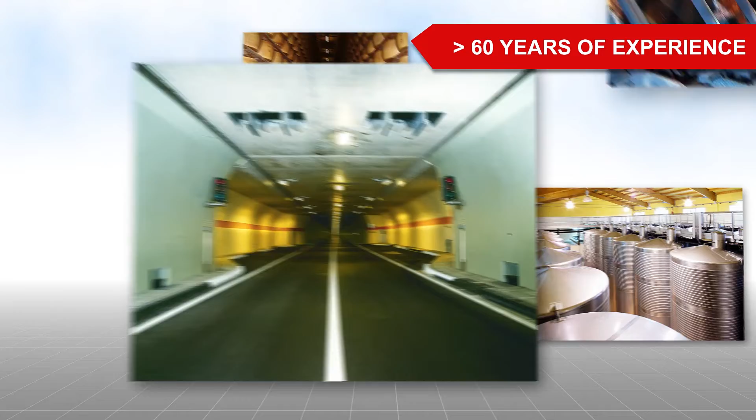For over 60 years, Securiton has focused on fire detection in areas where conventional fire detectors reach their physical limits. This is where the new Securiton ADW 535 line-type heat detector comes into its own. Fire detection in areas where everything else fails has always been Securiton's specialty.

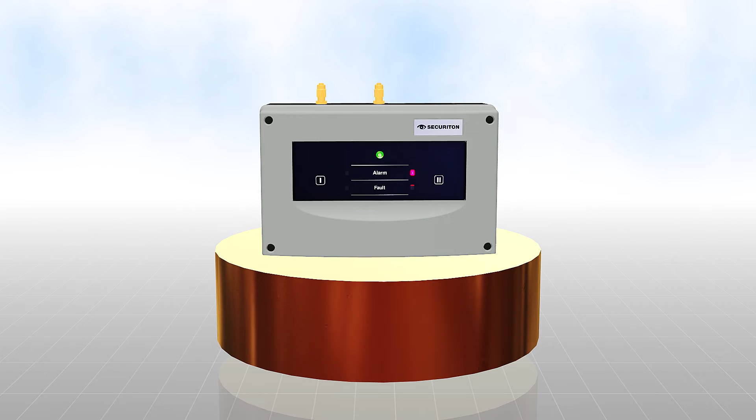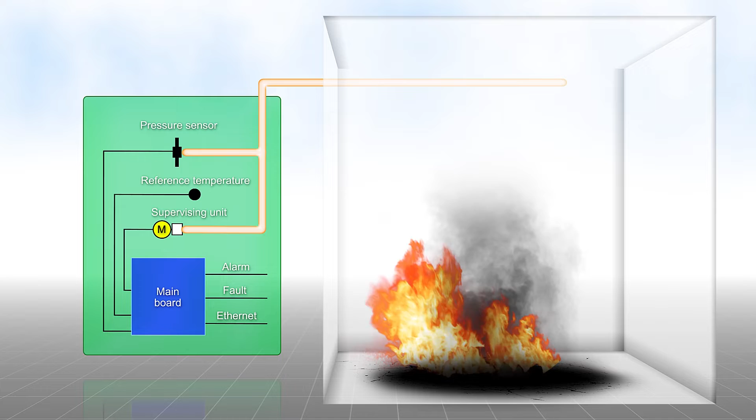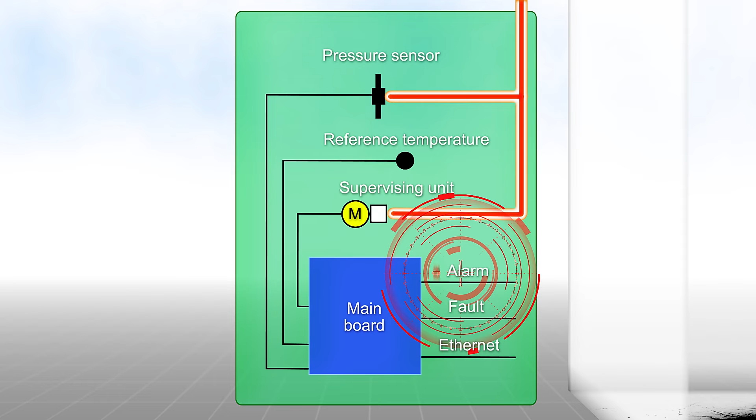The operating principle is simple and reliable. Air-filled sensing tubes are laid in the room to be monitored. If the temperature increases, then the pressure also increases in the closed sensing tube. An electronic pressure sensor records this pressure, which is then monitored constantly in the processing electronics and compared with the alarm criteria. An alarm is triggered immediately as soon as this limit has been exceeded.

A thin copper tube is normally used as the sensing tube. If required due to the ambient conditions, this can also be made from stainless steel or Teflon. The sensing tube can be used in virtually all operating environments, including in Ex areas.

The fully automatic sensing tube monitoring detects any errors, regardless of how improbable they might be. If there is suspicion of a leak, and at specific intervals, a monitoring device generates a defined overpressure in the sensing tube. If the measured pressure increase deviates from the saved nominal value, the computer reports a fault immediately.

The response behavior can be set within a large range. The ADW 535 is one of the quickest line-type heat detectors worldwide, and also complies with EN 54-22. The intelligent DHW dynamic heat watch algorithm on the ADW 535 ensures that rapid increases in temperature caused by the ambient conditions do not result in a false alarm.

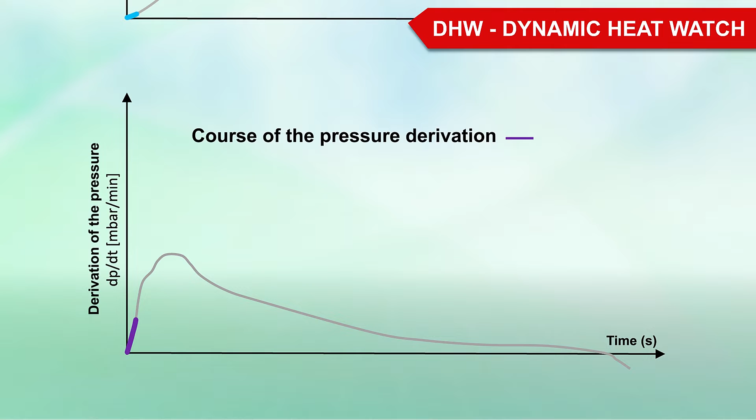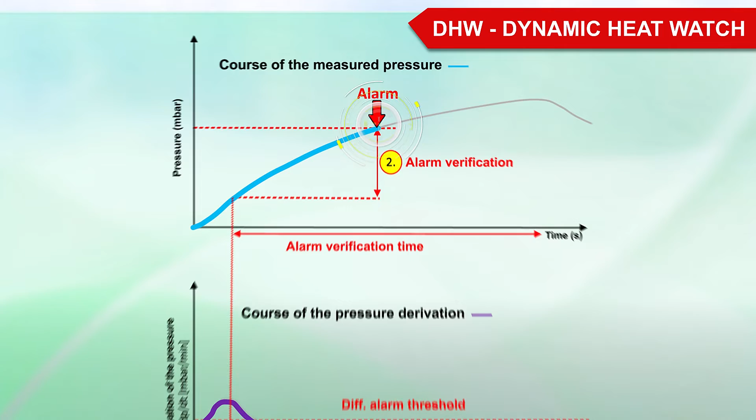First, the pressure gradient is considered. If the rate of rise of the pressure exceeds the configured limit diff alarm threshold, the delay time is started. If this limit value remains exceeded during the defined time, the alarm verification algorithm is started. In a second step, the pressure is expected to increase by the alarm verification value. If this is the case, it is a fire and the alarm is triggered. If the alarm verification time expires without the expected pressure increase, then this is only a disturbance.

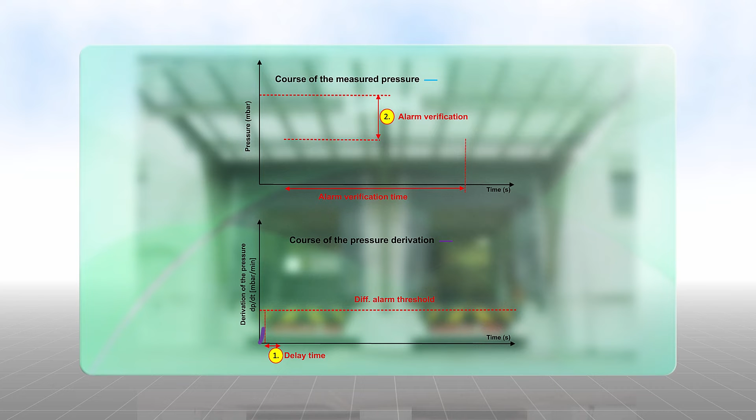This can be explained well using a loading platform as an example. The sensing tube is installed under the roof on the outside of the loading ramp. If a large door is opened in the winter, a rush of warm air hits the sensing tube and creates a rapid increase in pressure. Because the rush of air quickly disappears, the measured pressure decreases so that the alarm verification time expires without incident. No fire alarm is triggered.

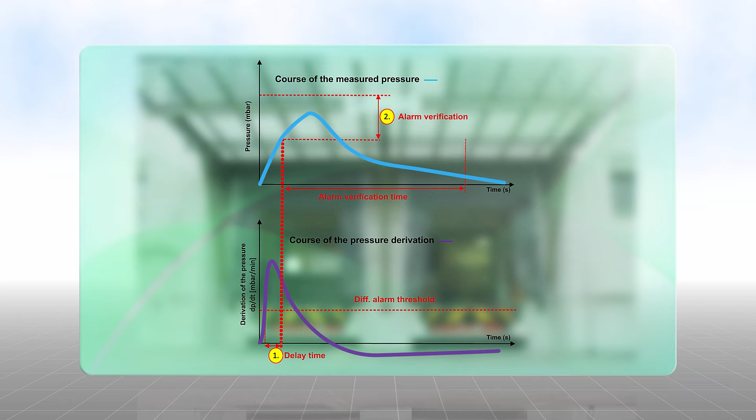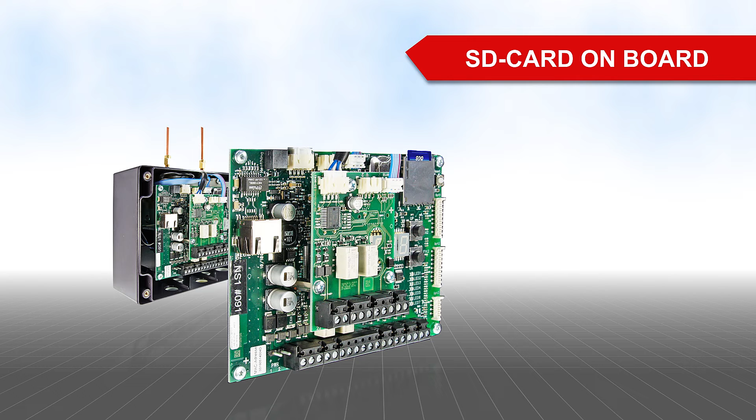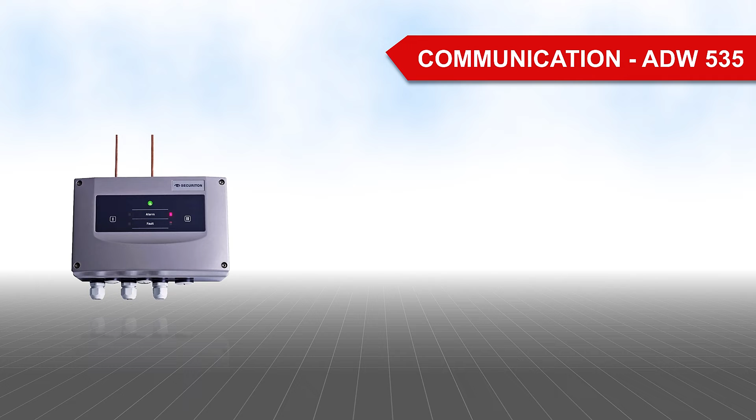Want to record and evaluate monitoring data? No problem. Use the optional memory module to make comprehensive, long-term recordings directly on an SD card and then evaluate the data later on a computer. The Securiton ADW 535 also communicates automatically with superordinate systems. Various interface prints allow networking with fire alarm control panels or management systems.

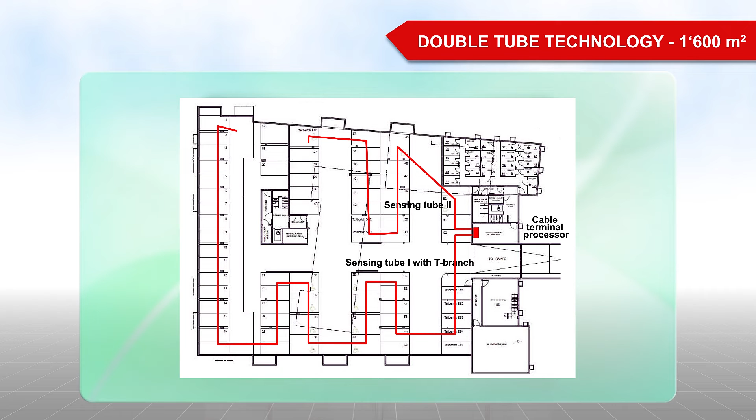Two sensing tubes can be connected to the Securiton ADW 535, which is known as double tube technology. This means that an area of up to 1,600 square meters can be monitored with one processor. Whether in underground garages, large kitchens, storage halls, production facilities, high-temperature applications or tunnels, users can rely on the Securiton ADW 535 line-type heat detector.

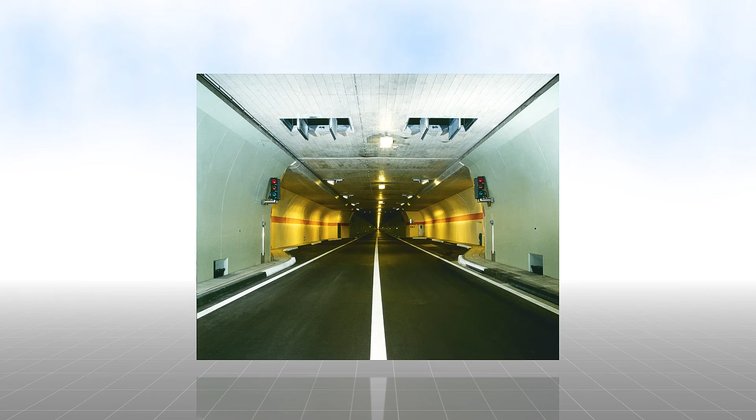Fail-safe operation is thus guaranteed, even when the prevailing conditions are extremely poor. The detector can then be used without restriction in locations where conventional fire detectors would not be able to cope. The ADW HeatCalc software tool allows the planning of safety systems at a very early stage. The ADW Config software tool is a practical aid during programming and maintenance of the ADW 535.

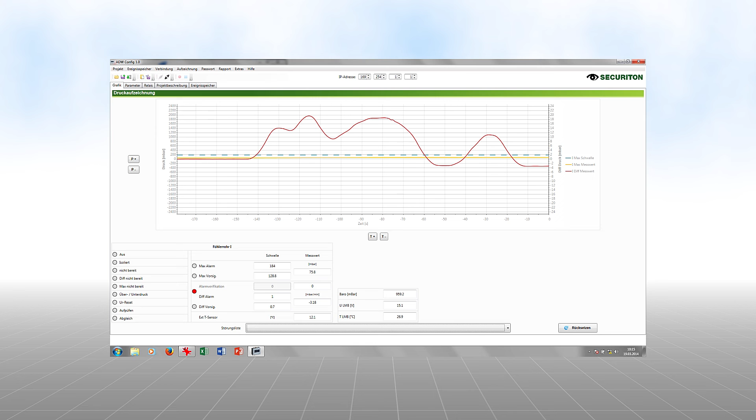ADW 535, when durability pays off, as confirmed by test officers worldwide. From Securiton.